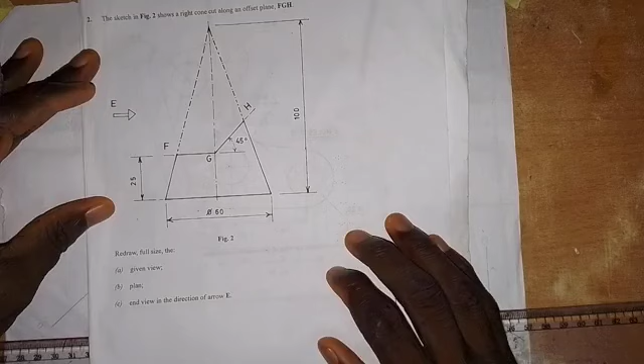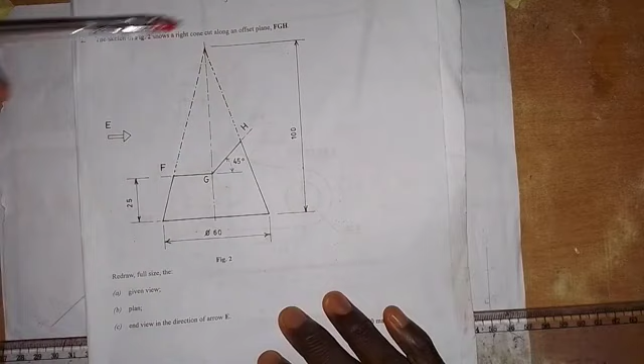Welcome to my channel, and here we are going to solve this problem, and it has to do with a truncated cone. Based on what we have here, the sketch in figure 2 shows a right cone cut along an offset plane FGH. So we draw full size the given view, plan and end view in direction of E, and the height of the cone is 100 millimeters.

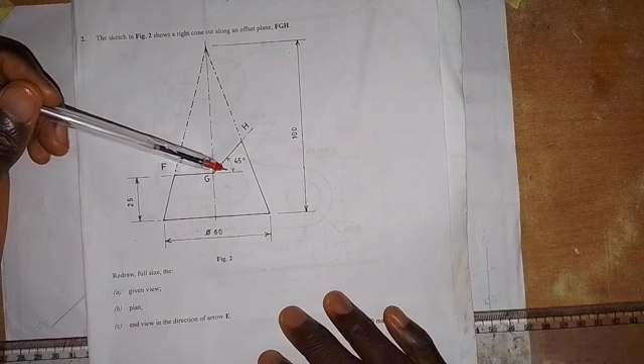The diameter of its circular base is 60 millimeters, and the cutting plane touches this point, which is 25 millimeters away from the base of the cone, and this line GH is at an angle of 45 degrees to the horizontal, as you can see here. So what we need to do first, I'm going to show you that right now.

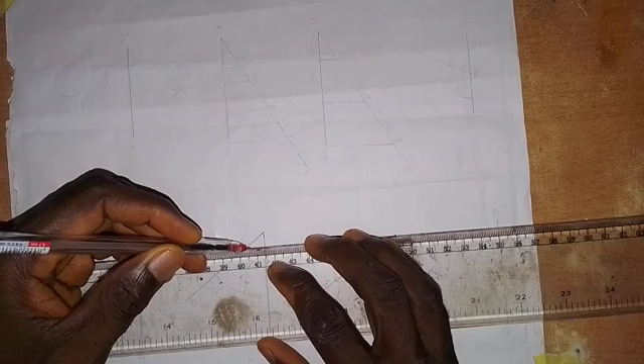So let's start. What we need to do first, as I said, is draw a circle, but before that we draw a horizontal center line like this. Then we are going to draw a vertical center line. Okay.

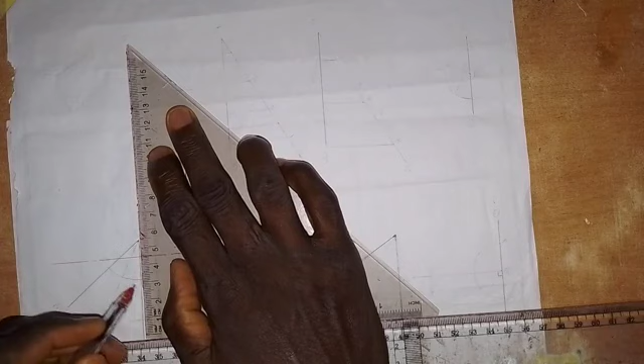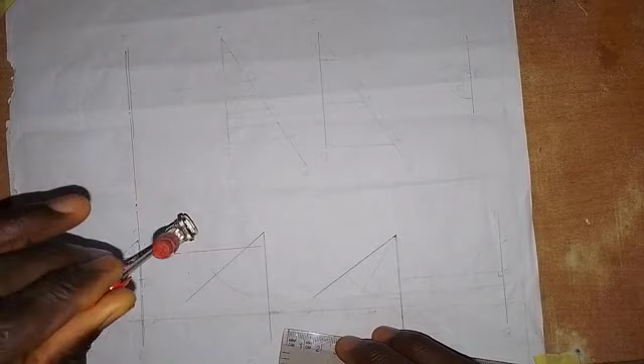Then we are going to draw the circle, and as we are told in the question that the diameter is 60, the radius should be 30. So take a measurement of 30 millimeters with our compass and put it at this point. Then we draw the circle. Okay. So this is the circle, and we are going to divide it into 12 equal parts. So I'm going to divide it here right now.

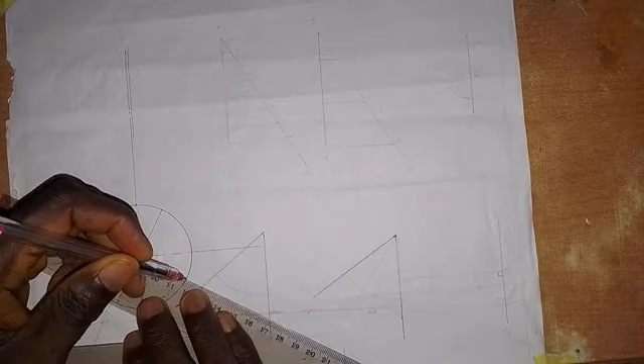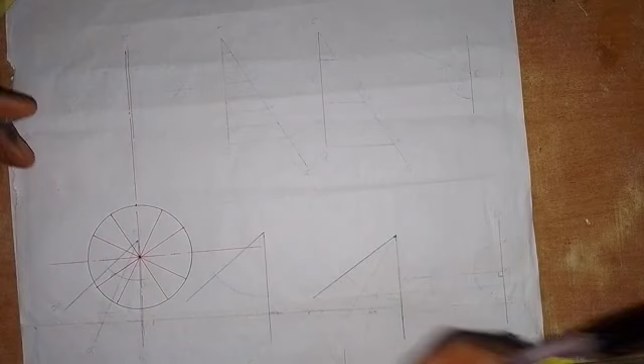Alright, so the circle has been divided into 12 equal parts. Then we are going to number this circle. This is point 1, this is 2, this is 3, here is 4, 5, 6, 7, 8. This is 9, this is 10, here we have 11, and this is 12.

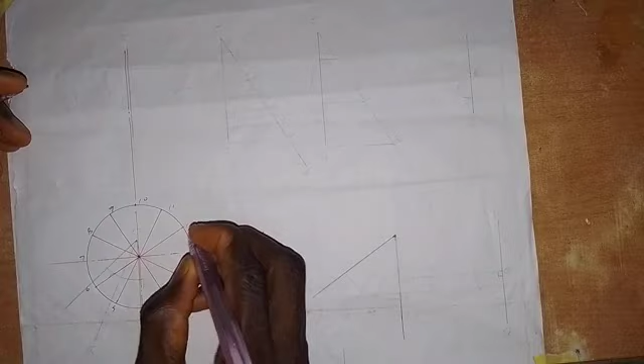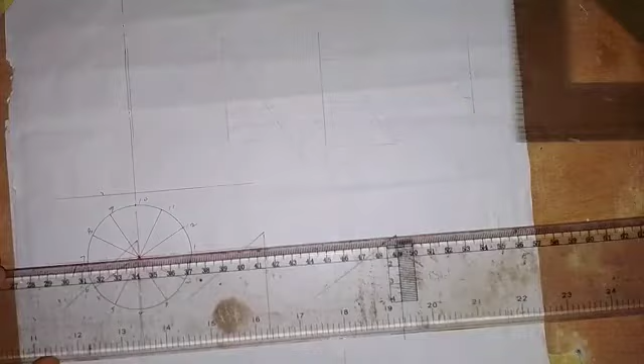Okay, so the next thing is that we come up a little bit and draw the horizontal line like this. Then I need to extend this vertical center line. Looking at it, it will not be up to 100 millimeters as we have in the question, so I'm going to take a measurement of 100 millimeters here. This is 100 millimeters, and this is going to be the apex of the cone.

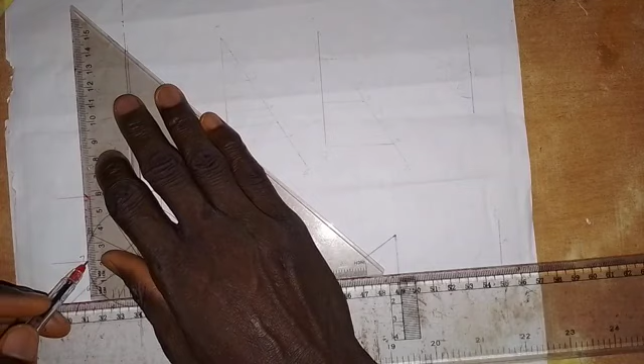But before we go on to draw the front elevation, we need to draw a vertical line from point 1 going up. We draw a vertical line from point 12, which is meant for 2 and 12. A vertical line from point 11, which is meant for 11 and 3. And we have drawn that of 4 and 10. We draw a vertical line here, meant for 5 and 9, a vertical line from this point, meant for 6 and 8, and from point 7 we draw a vertical line to touch the horizontal line.

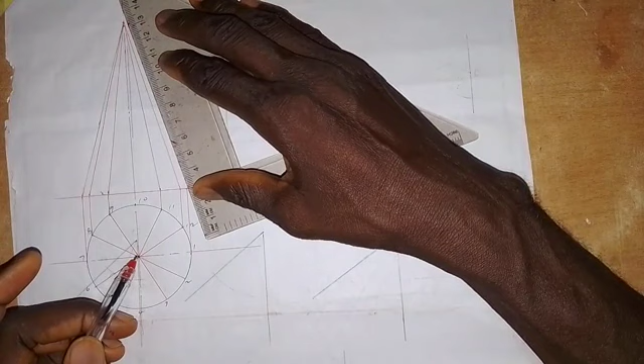The next thing we are going to do is connect point 7 with the apex of the cone, and I need to make this line more visible. We also connect this point with the apex of the cone, and this point also. We connect this point here with the apex of the cone, and this point also, and the last one is this. So we connect it with the apex of the cone.

Alright, so we are going to take a measurement of 25 millimeters from the center here. So this is 25 millimeters. Here I'm going to draw a horizontal line through this point to meet this side of the cone, like this. We make it a thick line.

Then we take our 45 degree set square as we have in the question and use it to draw a line to meet this point here, which means this part is cut off. Then we need to make this line a thick line, and this will also be made a thick line.

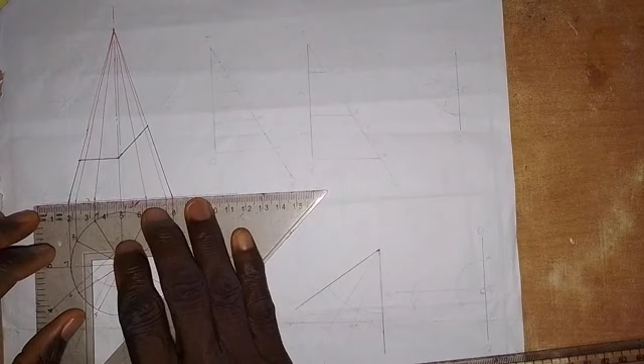So every other line is a thin continuous line, so then we make this line a thick line. So apart from these three lines, all other lines are thin continuous lines as I left it unticked.

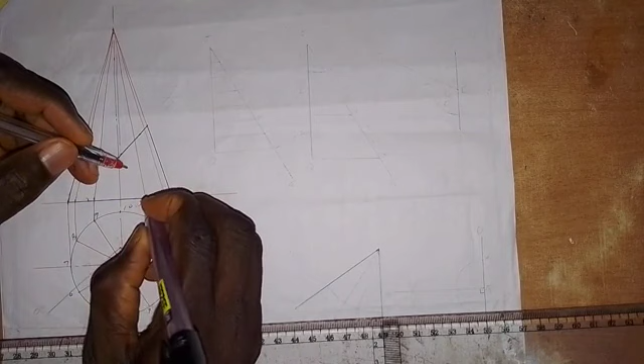So the next thing that we are going to do is that, as we have here, if I'm to number this, so this is going to be point 1 prime, while this point will be point 2 prime, 12 prime. Okay, so this will be point 3 prime and 11 prime. So this is point 4 prime, and then we have 10 prime. So this is point 5 prime, and then we have 9 prime. So this is 6 prime, and then 8 prime, and this is point 7 prime. So as we have here.

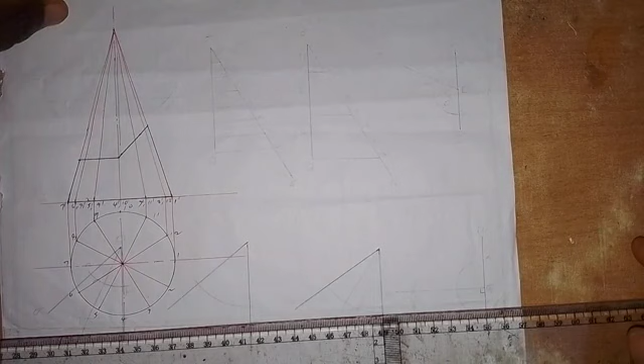So now, as this part is taken away, we are going to have a rough surface here which has to be shown in the plan. So very, very important. So what we need to do now is that we are going to draw a vertical line. The cutting plane touches line 1 at this point, so we draw a vertical line from here. So from this point, we draw a vertical line to touch line 1. So it touches line 1 at this point. So we have to take note of this point.

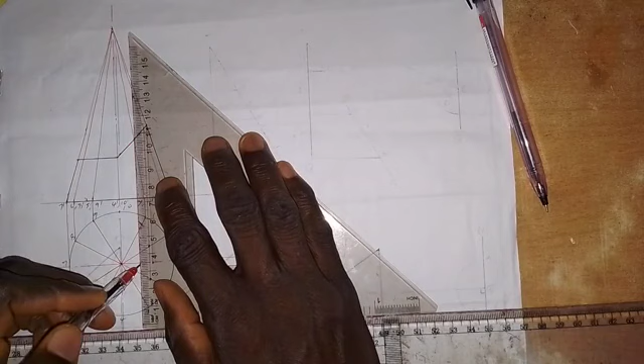Then the next is from this point here. That is for 2 and 12. So we draw a vertical line. So it touches 2 at this point, and it touches 12 at this point. So next is from this point, which is meant for 3 and 11. So we draw a vertical line like this. So it touches 3 at this point, and it touches 11 at this point.

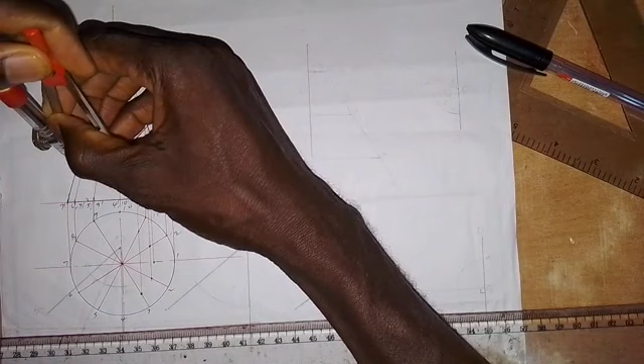So what about 4 and 10? So what we need to do for 4 and 10 is that we are going to take this distance, from here to here. So from this point, we take it to this point here, like this. So then we bring it to the center here. Then we make an arc on 4 and make an arc on 10 here. So we take note, so this is point 4, while this is point 10 here.

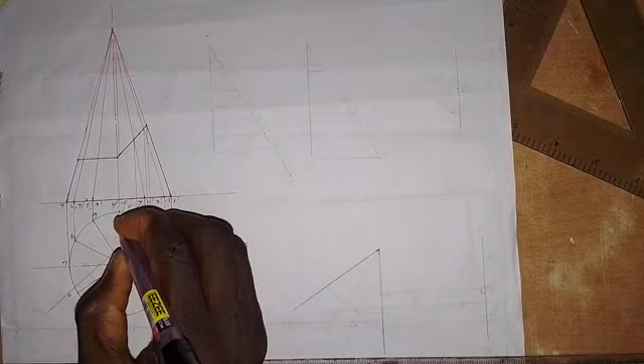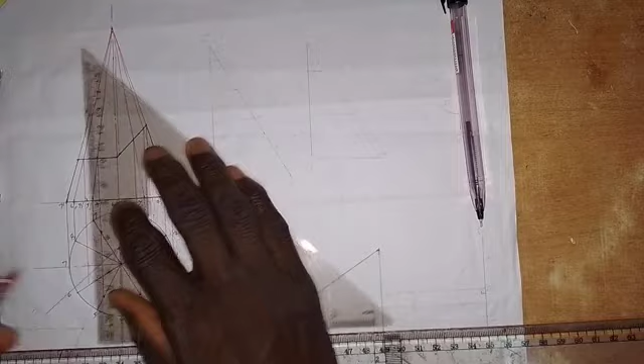So next, with our set square, this is point 5 and 9. So I'm going to draw a vertical line from here. Okay, so it touches 5 at this point, and touches 9 at this point. So the next is 6 and 8. So here I will draw a vertical line. So down here, it touches 6 at this point, and it touches 8 at this point.

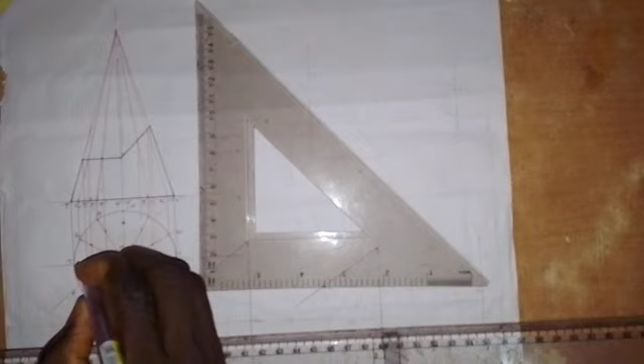So the last one is 7. So we also draw a vertical line from here, to meet point 7 here. So this is point 7 here. So all these points will be joined together with the use of French curve. I'm going to do that while I pause the video.

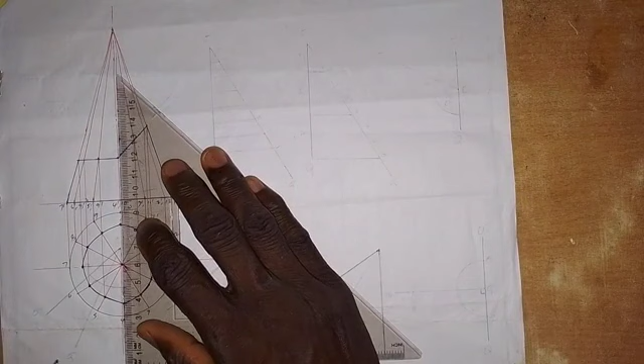Alright, so I've joined the points together, and this is what we have. But at this point, that contains 4 and 10, we are going to have a straight line. So if you can visualize what we have here, we are going to have a straight line that will be made thick. This is how we are going to have it. Okay, so this line will be a thick line.

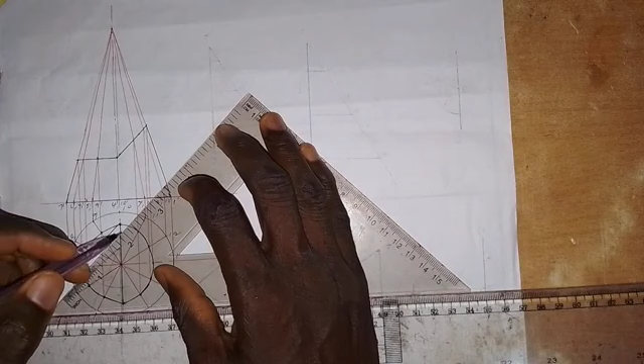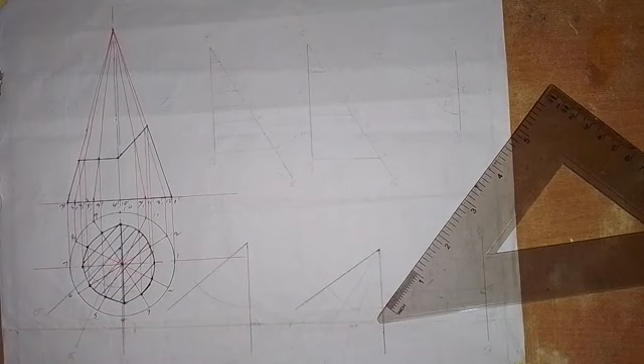Then we need to show the roughness of the surface, so that means we have to hatch this surface. So I'm hatching it like this. Alright, so this is how the plan will look. So then we go for the end elevation.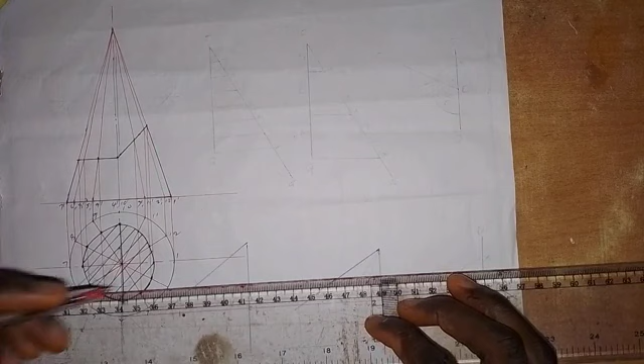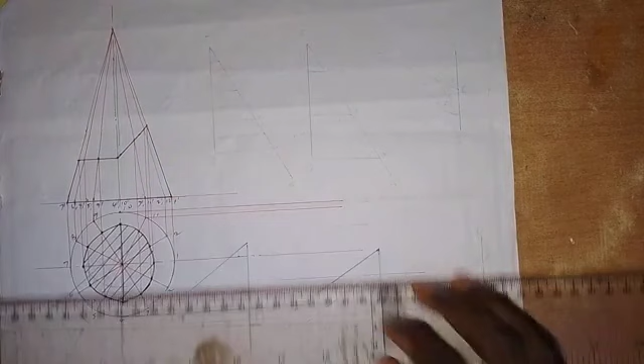Then this line contains 8 and 12, so we draw a horizontal line here. So this contains 9 and 11, so here we draw a horizontal line, and this is 10, so we draw a horizontal line here like this. So then we take our 45 degree set square, and we also need to extend this horizontal line like this. So we take our 45 degree set square, and we draw a line in this direction. So then this center line here that contains 1 and 7, I'm going to draw a vertical center line here.

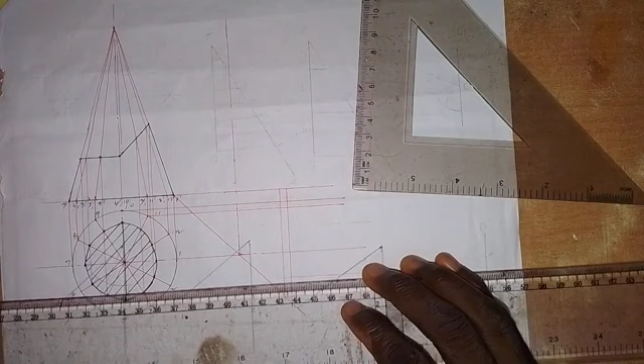Okay, so this contains 4, this is point 4, so I will draw a vertical line here like this, and this is for 3 and 5, so draw a vertical line. So this is for 2 and 6; the line is not really showing, so I will need to draw for 2 and 6 now. So this is the line. This is not appearing at all.

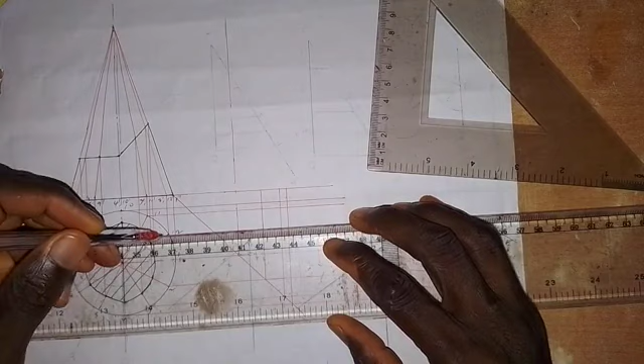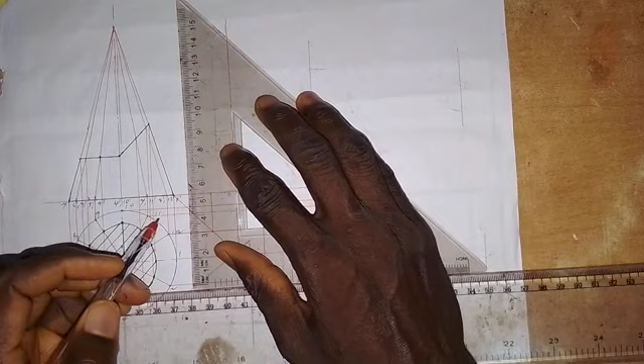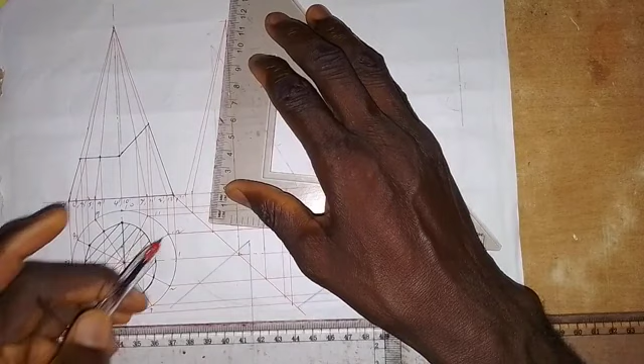Okay, so I will draw for 8 and 12. I will draw for 9 and 11, and this is for 10. So the next thing I'm going to do is to locate the apex of the cone, so I'll just mark it here. Then I'm going to join this point together with the apex, I'll also join this together with the apex, so this point also will be joined together with the apex, so I'll connect this.

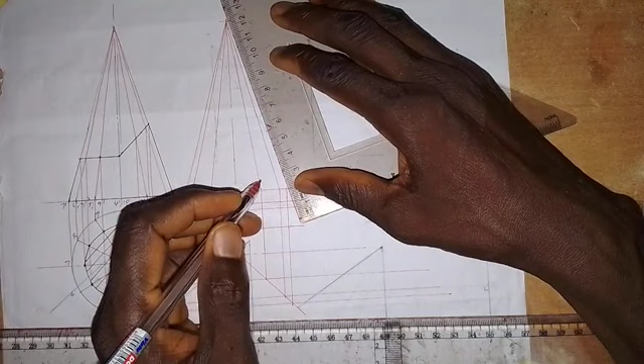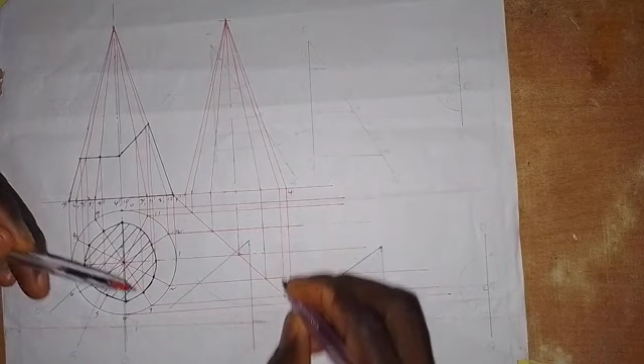Alright, so the next thing I'm going to do is locate all these points. But let me write this. So this is point 4, this contains 3 and 5, this contains 2 and 6, this contains 1 and 7, this contains 8 and 12. This is 9, 11, and this is 10.

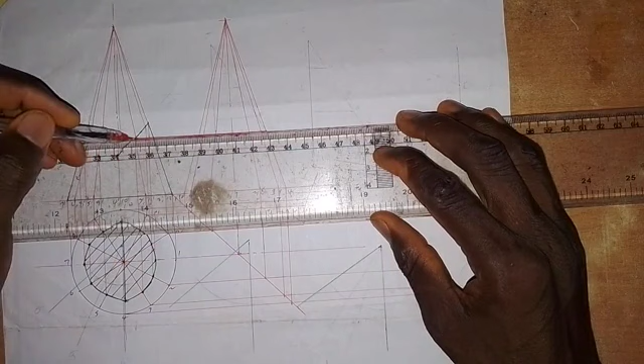So what we need to do next is, from this point I'm going to draw a horizontal line. From this point here I will draw a horizontal line, and from this point I will draw a horizontal line like this. So now, let's follow the numbering as we have in the question. So if I follow, this is 4.

So where do we have 4? Or let me start with 7. So if I start with 7, this is 7. If I follow this line, the center here contains 7. So all I need to do is to make this point 7 here. Okay, so this is point 7. So I have 7 there. Then the next is what? I have 6 and 8.

So 6 and 8, where do we have 6? It is still on this line. 6 and 8 are still on this line. So point 6 is here. This is point 6. Okay, and point 8. So where do we have 8? We have 8 here. So this is point 8 here. So even point 1 is here. Okay, just follow the numbering.

Then we have 5 and 9. So where do we have 5? I have 5 here. Then I have 9 at this point here. Next is point 4 and 10. So this is point 4 and this is point 10 here. So to now locate other points, this contains 3, 11. Where do we have 3? I have 3 along this line. This is point 3, and then this will be point 11.

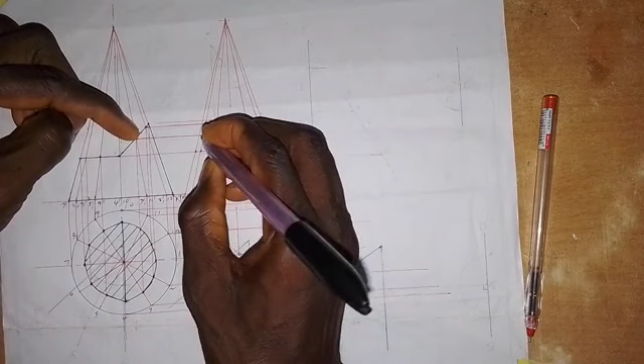So the next one is 2 and 12. Where do we have point 2? We have 2 at this point, and we have 12 at this point here. So then we are going to join these points together with the use of a French curve. So I can join this together.

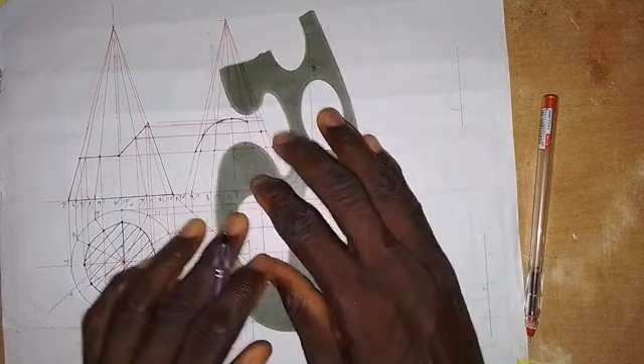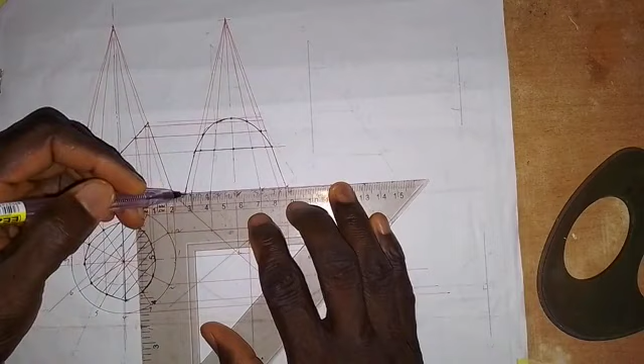Okay, so the next thing that we are going to do is make this line a thick line like this. And then this line, make it a thick line. We also make this line a thick line. Then this line, we make it a thick line. So this is how we complete this work. We have answered all the 3 questions.

We have to draw the given view, which is this. Then we have to draw the plan, which is this. Then end elevation. But for the end elevation, we also need to show that this is a cut surface by hatching it as I'm doing it here. Okay, so this is how we complete it. As simple as I've done it here, practice it, and become a master.